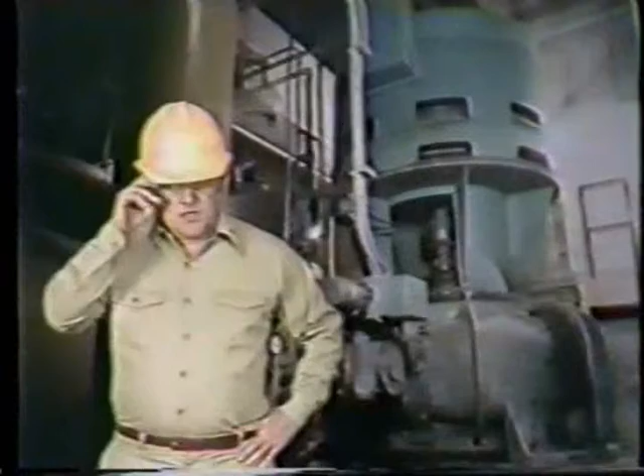So far in this unit, we've been concentrating on condenser construction and the condensing process. As we noted earlier, in order for steam to condense, latent heat must be removed. This is accomplished by pumping cool circulating water through the condenser tubes to absorb the latent heat in the exhaust steam. The system that supplies this water to the condenser is called the circulating water system. Let's take a look at circulating water systems and discuss their components.

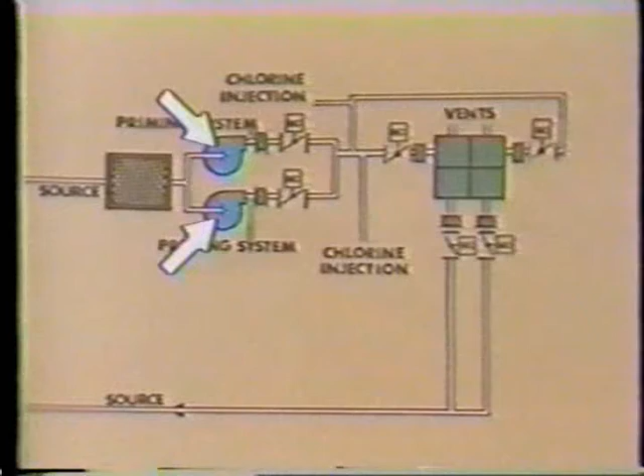And as you can see on this drawing, the system consists of screens, pumps, valves, expansion joints, and piping. Let's follow the flow of circulating water from the water source and through this system. Since the water source can have a lot of trash and debris, there are usually coarse screens and fine screens between the water source and the circulating water pumps to filter out this debris.

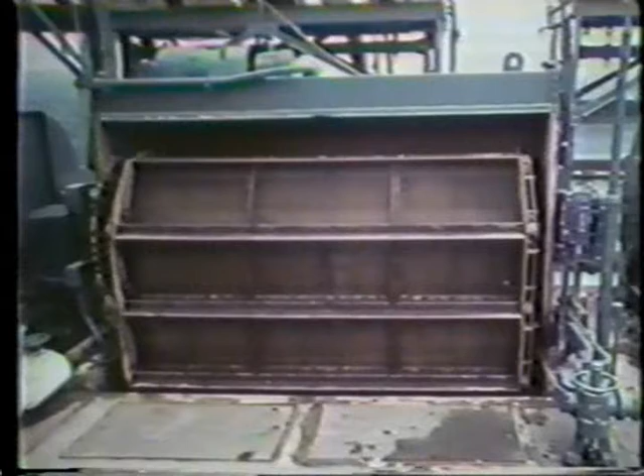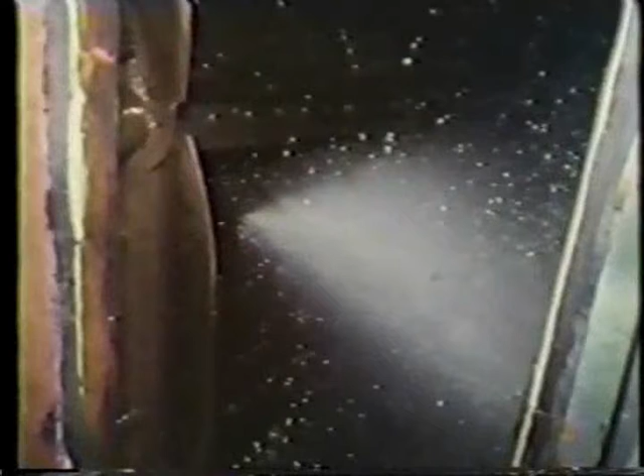Coarse screens, often referred to as trash racks, filter out large debris such as logs or branches. Fine screens filter out smaller debris such as litter or trash. Fine screens are often referred to as traveling screens because they rotate into and out of the water when necessary. When these screens are rotated out of the water, they're usually sprayed with water to clean off the debris. After flowing through the screens, the water branches off and flows through the circulating water pumps.

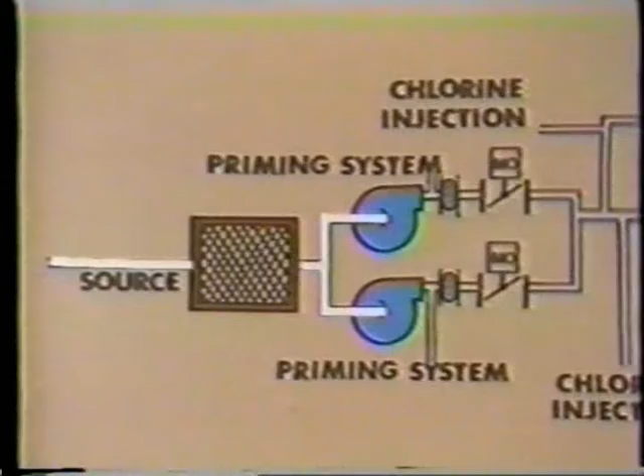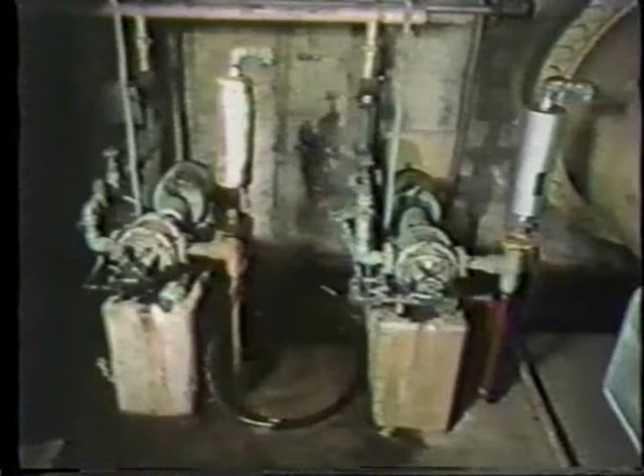Circulating water pumps are generally large centrifugal pumps capable of pumping thousands of gallons of water per minute. Most centrifugal pumps must be completely filled with water or primed in order to operate properly. Priming doesn't pose as much of a problem for pumps that are at or below the level of the water source, but often circulating water pumps are above the water level. For these pumps, a priming system will be provided.

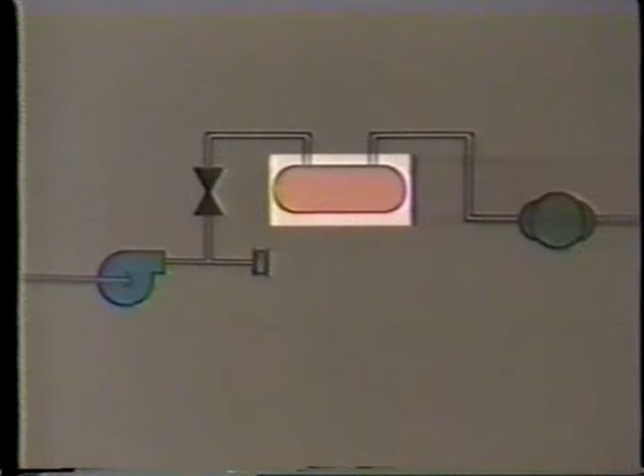So, let's take a minute and talk about one type of priming system. This system consists of a vacuum pump, a priming tank, and a priming valve. The vacuum pump removes air from the priming tank. When air is removed from the priming tank, a vacuum is formed in the tank and in the piping of the priming system. The priming valve is located between the priming tank and each circulating water pump. The function of a priming valve is to open should air enter the pump for any reason. As long as the pump is filled with water, the priming valve remains closed.

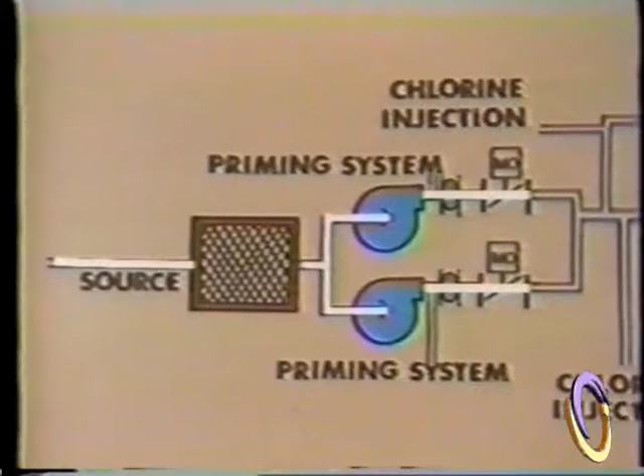Returning to our circulating water system drawing, we see that the circulating water flows through the expansion joints and the discharge valves. Expansion joints allow for some piping movement, such as when the pumps are started and a lot of water is flowing through the system. The discharge valve is often a motor-operated butterfly valve. This valve is open while the pump is operating, but is closed when the pump is shut down. This prevents any backflow through a non-operating pump.

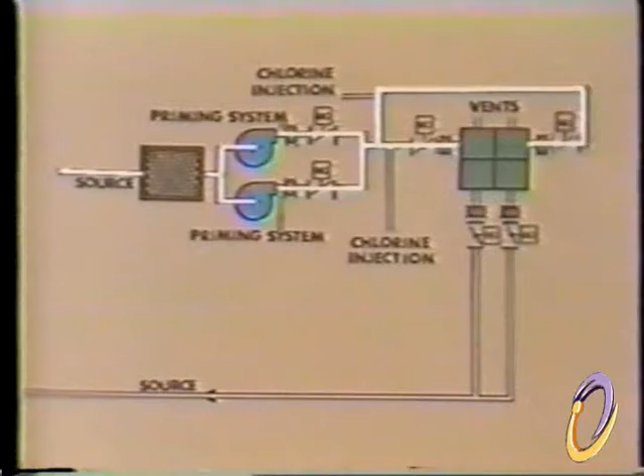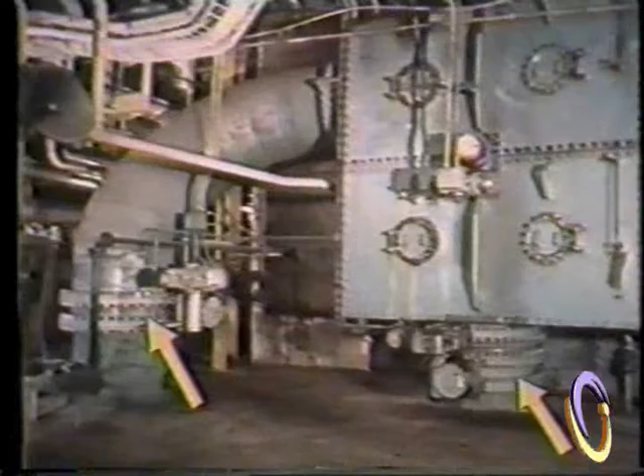When the circulating water pump is operating, it adds enough energy to the water to move it through the piping and valves into the condenser, through the condenser tubes, then through the piping and valves that return the water to its source. These components are the water box inlet isolation valves and the water box outlet isolation valves. These isolation valves are often large motor-operated butterfly valves that are open during normal operation. But if one of the water boxes needs to be shut down for maintenance, the isolation valves for that water box are closed, and the water box and tubes can be drained. In this way, the other half of the condenser tubes can continue to operate.

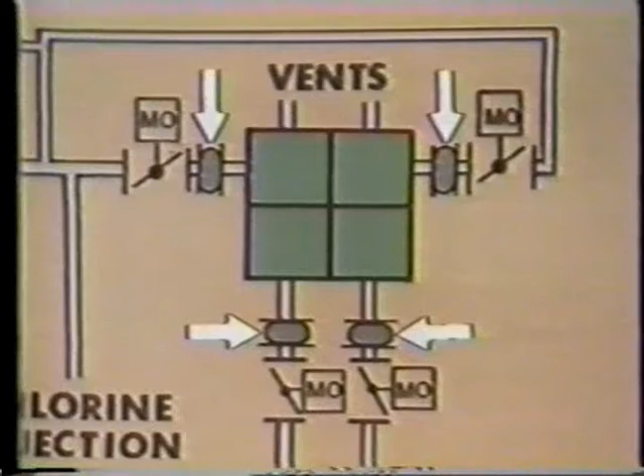These are expansion joints, and as we noted earlier, they allow for some piping movement. The last elements of this circulating water system that we'll talk about are the connections to the water box priming system and the chlorine injection system. The water box priming system is very similar to the pump priming system we discussed earlier. It consists of a vacuum pump, priming tank, and vent valves. The function of the water box priming system is to remove any air in the condenser water boxes. By removing the air from the water boxes, this ensures that the tubes are completely filled with water so that maximum heat transfer takes place in the condenser.

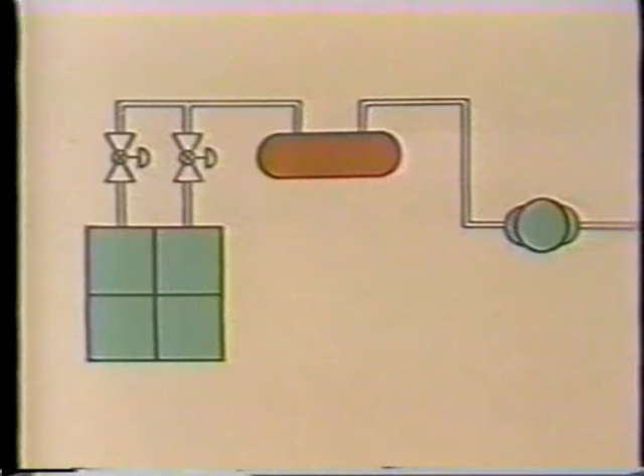The other connection is to the chlorine injection system. The function of a chlorine injection system is to add chlorine to the circulating water, which in turn retards the growth of contaminants such as algae and bacteria in the tubes. Depending on system design, either gaseous chlorine or a liquid chlorine solution may be used. But besides adding chlorine to the system, some plants add other chemicals to reduce buildup of hard scale in the condenser tubes. If these contaminants were allowed to build up, they would reduce the heat transferability of the tubes.

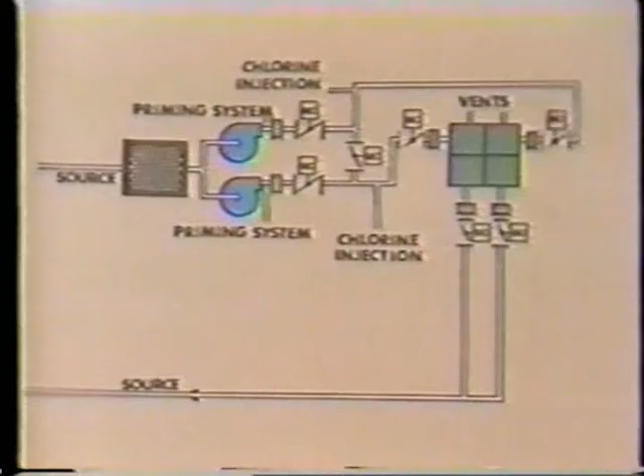As with most of the systems we've been looking at, there can be other designs of circulating water systems. One common variation is this one. This system is similar to the one we just looked at, but for this circulating water system, a circulating water pump serves each water box individually. As you can see, there is also a cross-connect, or tie valve in this system. This valve is closed during most operating conditions.

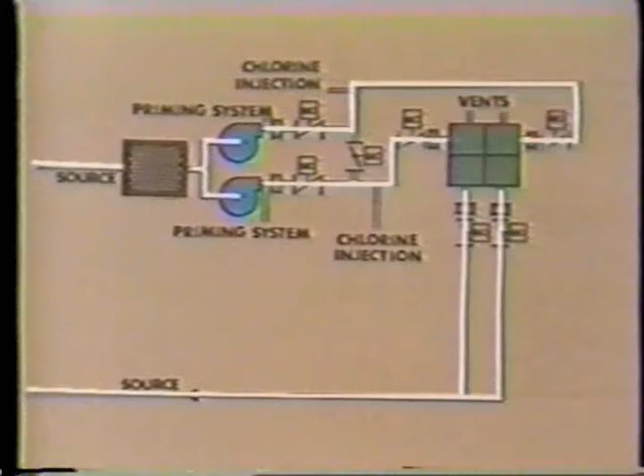However, one condition that could cause this valve to be open is when one of the circulating water pumps needs to be shut down. With one of the pumps shut down, the discharge valve is closed and the cross-connect valve is opened to allow the flow of water to continue through both halves of the condenser. Under this condition, turbine load may have to be reduced, but the turbine does not have to be shut down. Well, so far we've been looking at once-through circulating water systems that use water from a large water source and return the water to that source.